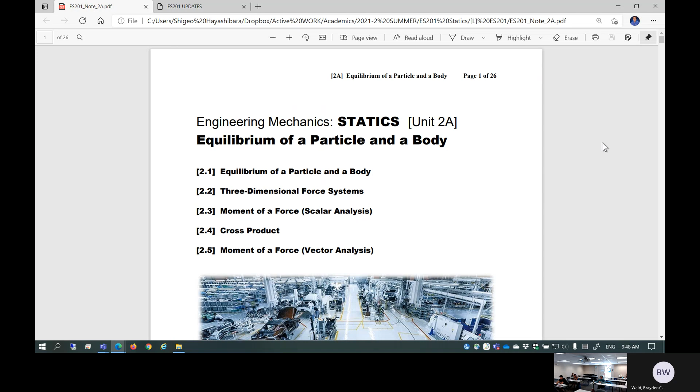I'm not kidding. This actually happened. There's one student taking my aerodynamics class who, during the final exam, raised a hand: I just can't remember the equation of a circle. You mean pi r squared? Yeah, yes. That happens. No problem. Okay. Any other question? All right, let's get going.

So section 2A, we are going to start talking about statics. What do you mean, statics? Do you remember the question? What is statics? I think we talked about that. This is statics. What is statics?

You are going to express a system, a mechanical system of some kind. We are going to start with a small tiny particle, maybe a baseball or something here. You apply force here, force there, force there, force there. Everything is in balance, so the baseball stays in place. Statics. So equilibrium is something we are going to take a look at in this class. This is the main subject.

So we are going to start with a particle, and then apply it on 2D Cartesian, then extend it to 3-dimensional Cartesian space. We are going to introduce a moment. Do you know the moment? Suppose the force is applied right here with this much offset distance; it is going to create the tendency to rotate. That's called moment. So force times distance creates a tendency to rotate. That's essentially the torque of the drive shaft of your car. Anyways, we are going to talk about that.

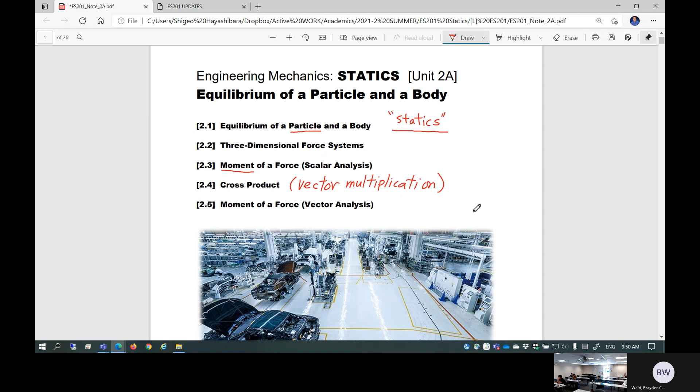At that moment, we are going to introduce the vector cross product. We already looked at the vector dot product. The cross product is sometimes called vector multiplication. Remember, dot product is a scalar multiplication; the result is a scalar. Cross product is vector multiplication; the result is a vector. So a vector cross product against another vector is going to have a vector result, and that resolves a certain value in a certain direction, how much moment is developed. That's the meaning of cross product. So let's begin with the next page.

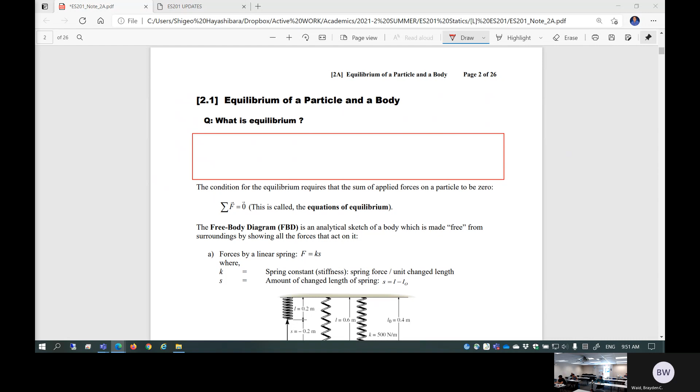Let's begin with a question: what is equilibrium? Interesting question. Anybody? What is an equilibrium? Go ahead, Yashan. "The forces and moments are balanced." Okay. Forces and moments balanced. As a result, no motion. This is essentially what the name statics implies. Okay, go ahead.

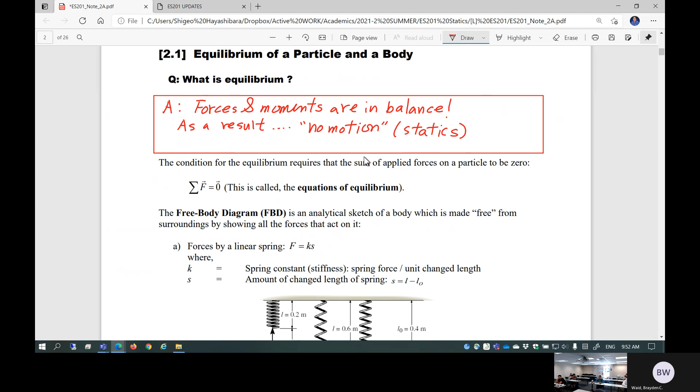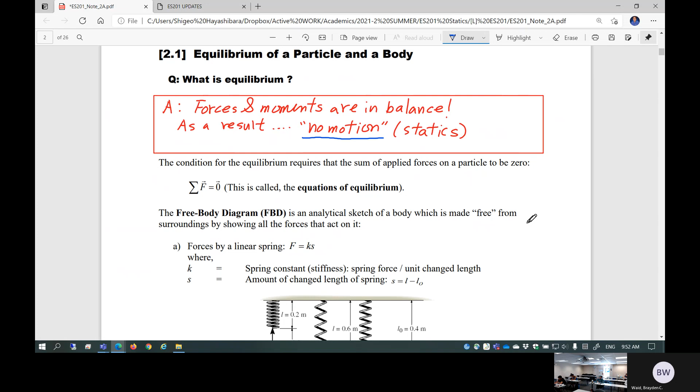"If a particle moves at the same velocity all the time, isn't it equilibrium as well?" It's not static equilibrium, but it's an equilibrium. Yes, you can say that. In other words, you are not accelerating, so constant speed motion stays constant speed. That's also often called equilibrium, but in statics we are going to avoid that because dynamics starts with that discussion. Good point. We restrict ourselves to no motion in this class. If motion is involved, even though it is equilibrium with no acceleration, dynamics will cover that.

All right, very simple. The equation of equilibrium: if you sum up all the force vectors, which could be multiple force vectors in lots of different directions and locations, the result is not zero, it's the zero vector. The summation of all the force vectors becomes the zero vector. Do you understand this? This is not the scalar zero. If this is a 3D Cartesian space, zero vector means that every single component in all three directions is zero.

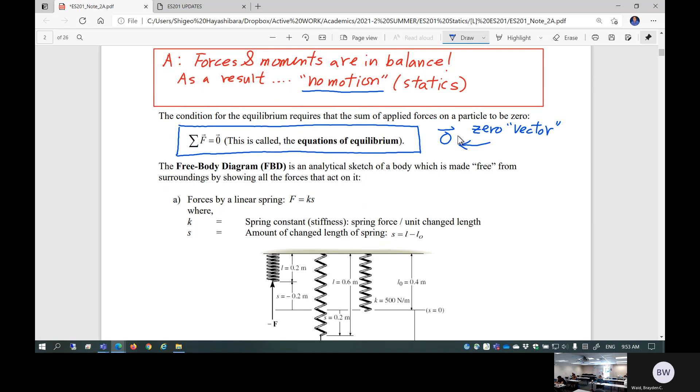That's why we indicate it with a vector notation on top. This is not the scalar zero. Even though the scalar component in x is zero, if you have a non-zero y and z component, the vector is not the zero vector. So let's be careful. I'm going to be very strict about vector notation versus scalar notation, because those are fundamentally very different meanings. Let's not mix up the usage.

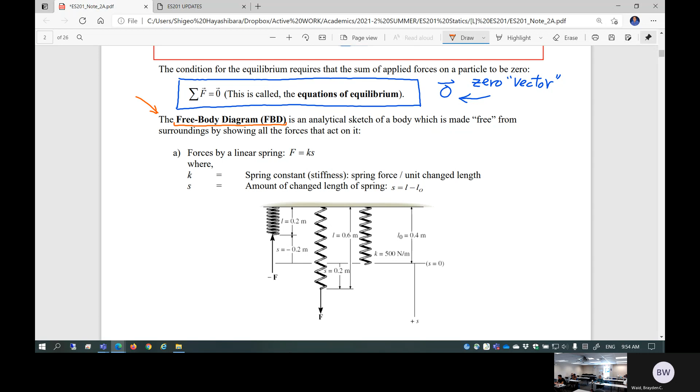Again, the important thing is the free body diagram. This is one of the key elements, as I emphasize all the time. The free body diagram is where you get started. If you draw a poor free body diagram, usually that's it; you can do whatever the rest, but you do the wrong thing anyways. It's super important, especially in statics and solid mechanics. So you have to train yourself as a good sketcher. Do a really good sketch, have a very accurate free body diagram, and your problem is 80% already solved. If you do a poor job, you can never solve anything.

Forces acting on a body, that's called a free body diagram. We are going to spend some time drawing free body diagrams, but there are forces developed within the system or mechanical system. A good example is a spring. This is the linear spring. The equation of the linear spring is force developed equals K times S. K is called the spring constant, or sometimes stiffness.

This is essentially how much spring force is developed per unit change in length. S is, of course, the amount of changed length of the spring. So if you pull the spring and stretch it 0.2 meter, and the spring constant is given, the spring constant multiplied by this S is going to give you the magnitude of the force, for example.

That's the linear spring. You can compress it, of course. If you compress 0.2 meter, we usually indicate a negative sign. With the spring constant multiplied, you're going to determine the force developed or force required to compress that much distance.

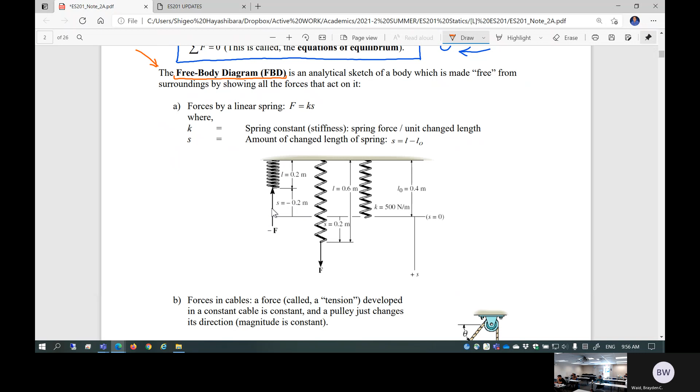Okay. Next one is very typical. There's a rope you're going to pull. A rope can only develop one type of force, something called tension. So we oftentimes use the notation T to indicate tension of the rope. A rope cannot be compressed. You can't do that.

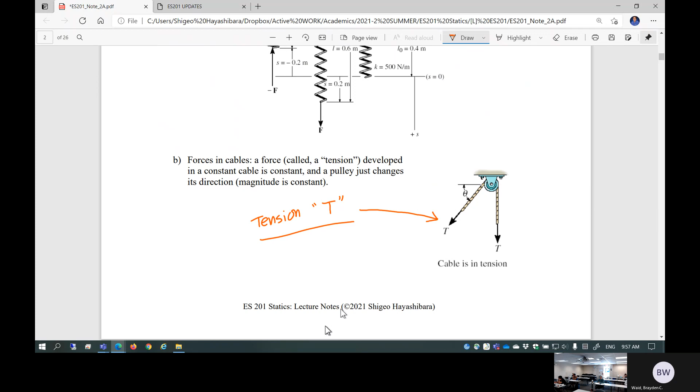Now, if you have a metal bar, you can actually compress or pull. So force could be tensile or compressive, but a rope cannot. So if you see a mechanism with rope, the only type of force you can develop is tension. And the direction is, of course, the direction of the rope. So the force developed inside the rope is in the same direction as the rope, basically. Very simple.

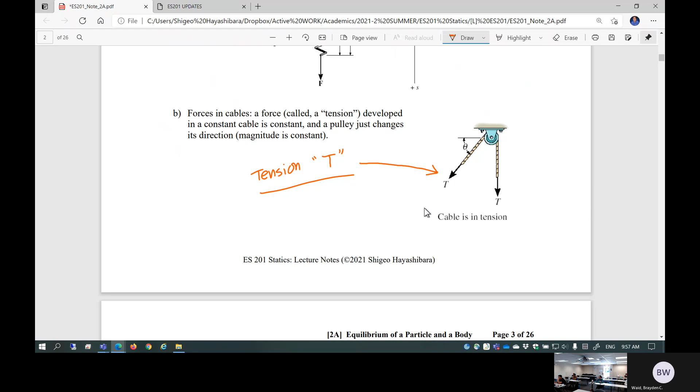Okay. So these are some of the key items of how to draw free body diagrams. There are a few homework assignments and also examples making you practice drawing free body diagrams. Do not underestimate this. This is very, very important practice. This is one of the most important key elements of ES201.

First of all, draw the outlined shape. A body is isolated, free from its surroundings. Free from its surroundings means if a body is connected with a certain device, such as pins, bolts, rollers, or whatever, you're going to try to disassemble it, make the body isolated from those constraints. And as you disassemble, remove the bolt and stuff like that, you're going to replace that with the appropriate reaction forces, support reactions.

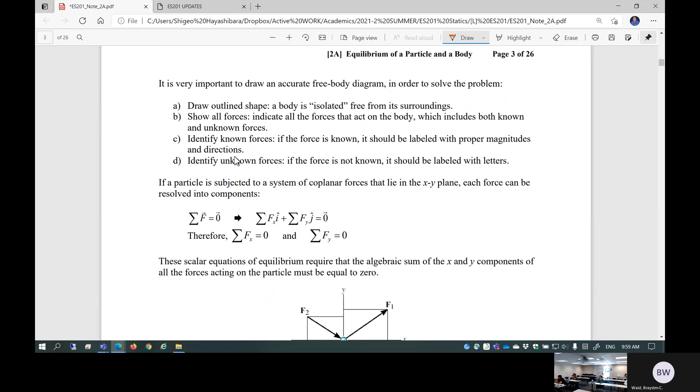And if a force is applied on the body, of course, you're going to put it with an angle, or it could be distributed loading, or a force applied at the tip. If so, you have to draw it. If the body comes with its own weight, you're going to find the center of gravity and apply that weight at that center of gravity. It's also quite important to identify both known and unknown forces, because unknown forces are something you want to find by applying the equations of equilibrium.

So for example, this is a particle. Looks like four forces are acting on it. Two forces are applied in one direction, and those two are applied in the other direction. This is a 2D x and y plane. So you have to identify the components of each force in the x and y directions. If you add them all up in x and in y, you can determine the resultant force components in x and y, then combine them to get the resultant force. And then you can determine the direction of that resultant force.

Isn't that something you did in quiz 1? Did you do it right? I hope so. But if you didn't, please fix it by yourself. Like I showed you, every time I did something wrong, I made the correction myself. In other words, for me, it's acceptable to make mistakes. I'm human, you're human. But it's not okay if you just don't care and don't correct any of your mistakes. It's not okay in terms of engineering standards. I'm not going to pass you in this class if you don't do that. Please correct your mistakes all by yourself.

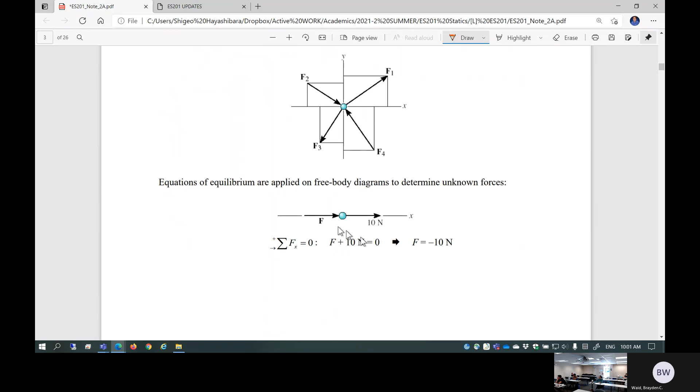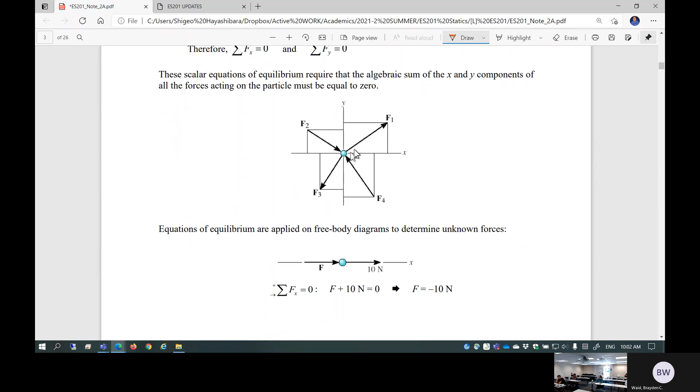Suppose this is like 1D, but this is a particle. Force F is applied in this direction, and 10 Newton is applied. What is the force F? You can find out this force by applying summation of all the forces in x direction set equal to 0. F must be minus 10 Newton if you call this particle in equilibrium. Equilibrium means if you add up all the forces, the result is the zero vector. That is equilibrium. That's why this particle is not going to move. Okay? All right.

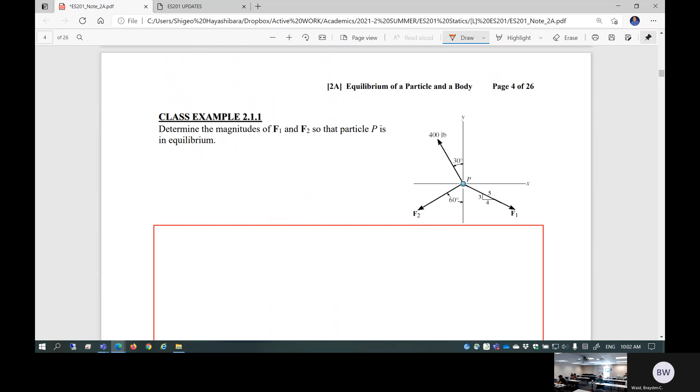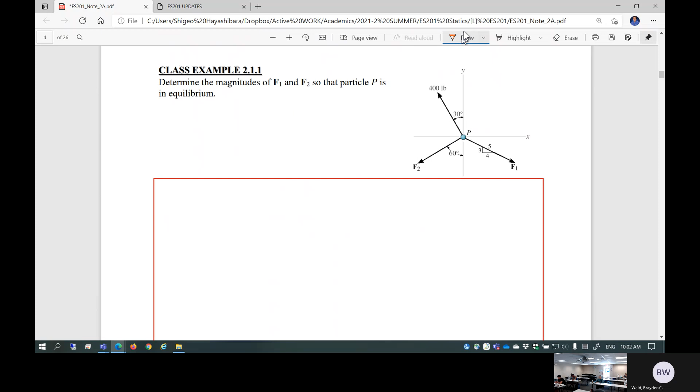So let's just take a look at some examples. Class example 2.1.1, page 4. Determine the magnitude of force F1, F2 so that particle P is in equilibrium. So I'm going to, of course, start with the free body diagram. As we construct the free body diagram, you're going to start with particle P. And I'm going to, first of all, set up the coordinate.

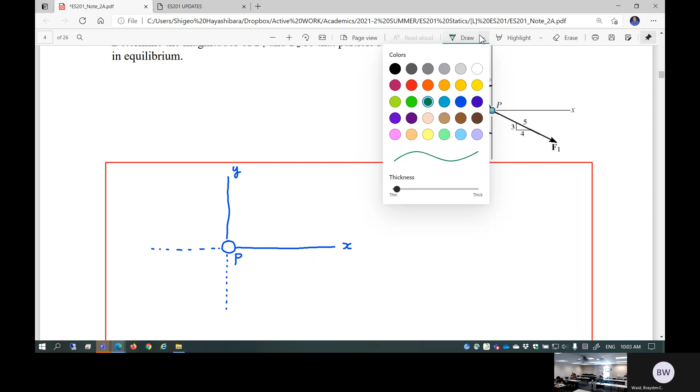I can't do it straight on, but anyway, this is the positive y coordinate. This is negative y direction. This is x coordinate, this is negative, and this is a positive x coordinate. And then let's begin with the known force. I'm going to use green to indicate known. So 400 pounds.

Sorry, I forgot to silence my phone.

Okay, so 400 pounds. This force is applied at 30 degrees from here. And then two unknown forces. I'm going to switch the color here. One of the unknown forces, F2. This is a vector. Looks like this is 60 degrees. And the other force, F1. Looks like the ratio is given, a ratio of 5, 3 and 4. Magnitude, I don't know.

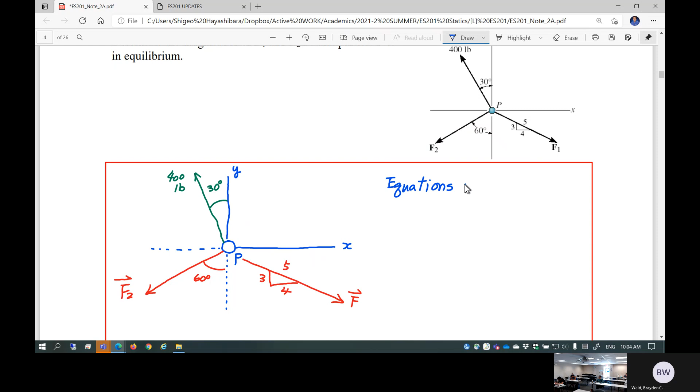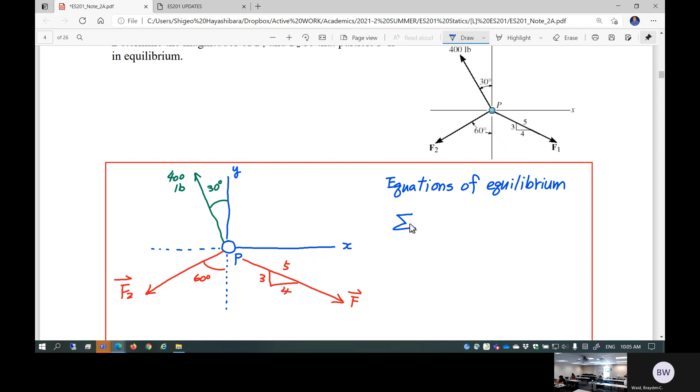So now we are going to apply equations of equilibrium. As you apply the equation of equilibrium, you're going to put the sigma. This is a summation. What kind of summation are you going to do? A force summation. And which direction are you summing the force? X direction. Which direction is positive X? This is the direction of positive X. So let's use this standard.

So I'm going to sum all the forces in X direction. This is the positive X direction coordinate. If this is in equilibrium, this must be 0. This is a scalar. In other words, the X direction components of all the forces must sum to 0. This is a scalar equation. So let's find out all the X direction component forces.

First of all, F1's component of X is this thing. What's this? Magnitude of F1 times what? What is the magnitude of that? The angle between that and... No, magnitude. Well, yeah, but I'm saying the equation. There's no angle given, but the ratio is given. So whatever the magnitude of F1 here, multiplied by 4/5, isn't it? Do you agree? So this is the magnitude of F1.

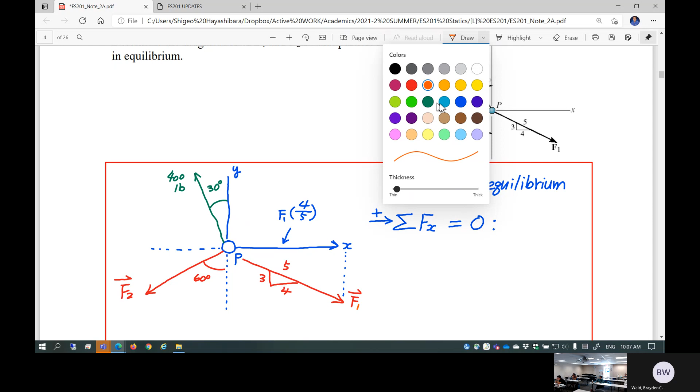What is the component force of F1? So this thing is F1 times 4/5. How about this? Anybody? What's this force? This is F1 times 3/5, correct? That's right. Do you follow that? Okay, so let's break down everything into X and Y components.

Go ahead, question, Ryan? I'm still struggling on why you chose 4/5 for the X direction. Because 4 is the X direction, and this is magnitude. Oh, that's X direction. That's right, this is X direction, and 3 is the Y direction, and 5. Okay.

And how about this? This is 400 times what? Sine or cosine? Which one? 400 sine 30. How about this force? This is 400 cosine 30. Do you follow? This is the 400 pounds x direction component, and this is the 400 pounds y direction component. So this is 400 sine 30, and this is 400 cosine 30. Do you follow that? I hope.

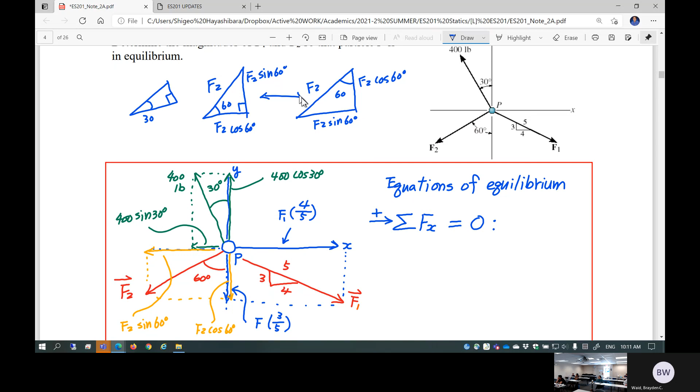You can sort of change the direction of that, making it like this. Let's say this is 60. This is 90. This is still F2. What's this? F2 cosine 60, right? This is F2 sine 60, right? Yeah. Same thing. Yeah, so it's just the same thing. Gotcha. You have to kind of rotate and take a look. Yeah. All right, anyways. So let's just add them up.

So forces in the x direction: F1 is, of course, this one. F1 times 4/5. This is a positive direction. Let's be careful. How about F2? This is minus because it's negative direction. This is F2 sine 60, right? How about 400 pounds? Again, it's negative. Be careful. 400 sine 30. This must be equal to 0. Okay?

This is one of the equations you came up with. Let's just simplify a little bit. This is going to be 0.8 F1 minus 0.866 F2 minus 200 is equal to 0. So you got one equation. Now this equation includes two unknowns. Do you realize it? F1 and F2, two unknowns. So this equation alone cannot solve this problem. You can only get the ratio of F1 and F2. Okay, that's the best you can do.

So you need other information. What is it? Of course, you can sum forces in the y direction, and then let's say this is the positive y direction axis. Okay, let's just set it equal to 0. Let's just do the same thing. So now F1's y direction component is this. Okay, be careful, it's negative. Negative F1. So this is F1. Okay, so this thing is negative y direction. So negative F1 times 3/5, right?

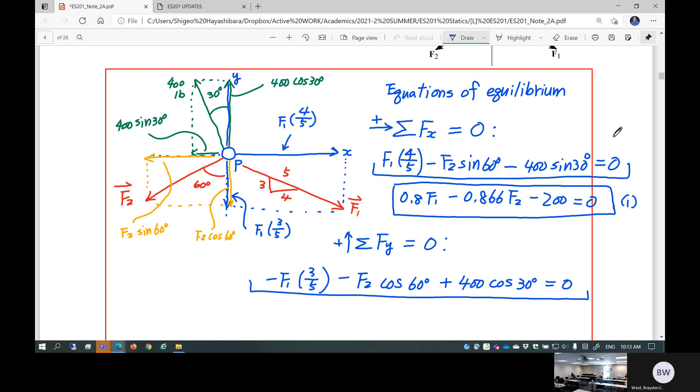Let's just simplify a little bit more. This is going to be minus 0.6 F1 minus 0.5 F2 plus 346.41 is equal to 0. Oh, you got the second equation with also two unknowns, F1 and F2. So now you have equation 1 and equation 2. So now you have to solve these simultaneously. Can you do such a thing?

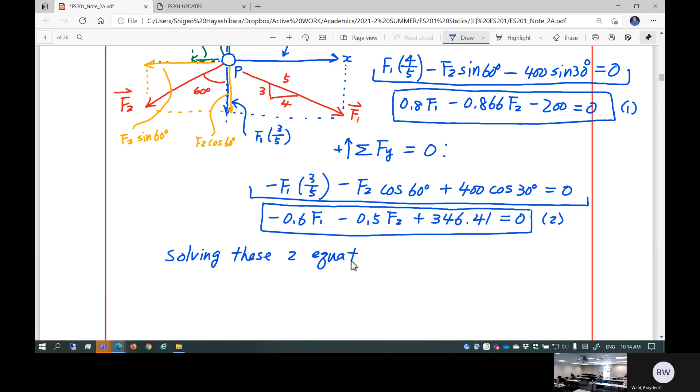Can you do such a thing? So let's just try. I wait for you, but just try to find out F1, F2. Because when I prepare this solution, I use software. I'm no longer solving two simultaneous equations, two unknowns by hand. Do you know how to do this? Let's just challenge yourself, because you will probably have to do this for your next quiz. Go ahead and do that, each person. Find out if you can do this kind of solution.

And then, of course, I welcome Brayden to basically join in and give the result. Can you get the value? Please, everybody, participate. If you want to get a good grade on the next quiz, do it. Get busy.

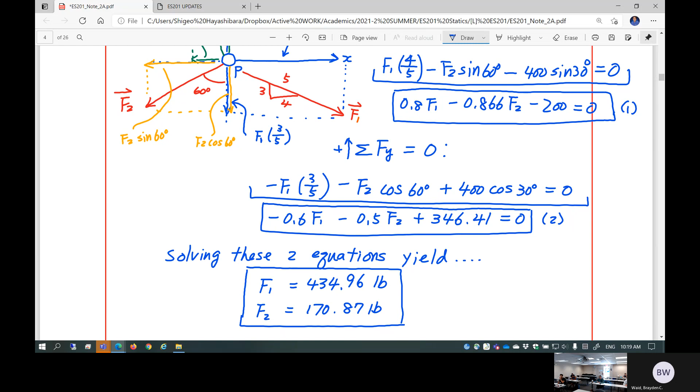Okay, guaranteed this kind of thing will show up on the next quiz. If you cannot solve it within the given time, you're not gonna pass this class. Sorry. Okay, pick up that kind of skill. This is not math class. I'm not gonna teach you how to do it. All right, let's move on.

So this is the homework. 2.1.1, determine the magnitude and the angle theta of F1 so that particle P is in equilibrium. Essentially the same kind of problem. So please do it right after today. I mean it, right after today. You actually start working on those problems. Do not leave it to the last minute. Okay?

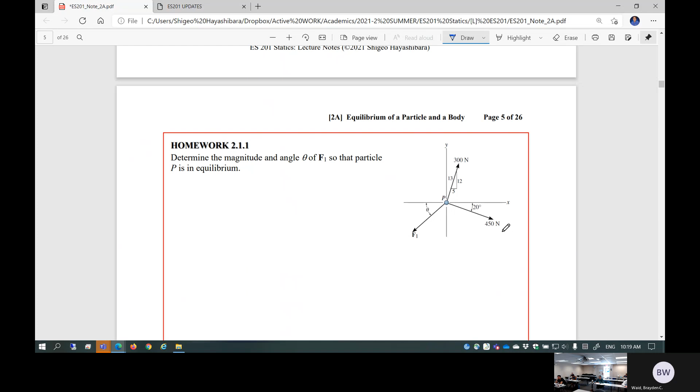Yes. Anybody else? Yeah. You go with, oh, this is mass. It specifies, so I think it's mass. Yeah, it's mass. It doesn't specify if it's a mass or not. The problem doesn't say anything about it. Is this mass? Oh my goodness. Because force, you would say 12 kilogram force. Oh, you're saying this is a force? No, this is a mass. So this is a 12 kilogram mass, you say?

Okay, go ahead. Is it force when they use the notation? Oh, this is a force if it's a notation of newtons. Can you convert kilogram into newtons? One is mass, one is force. You cannot convert those two. Wait a minute, didn't you take a quiz? So who actually takes it as a 12 kilogram mass? Raise your hand. One person, two, three, four, five, huh?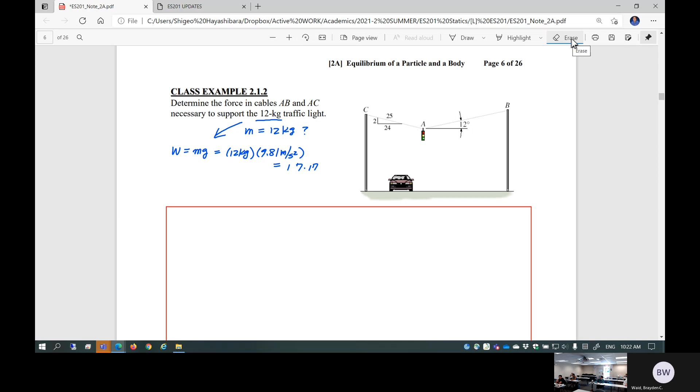If so, this is a mass, right? So you have to figure out what is the weight. Weight is mass times gravity. So let's just do that, 12 kilogram multiplied by g, 9.81 meter per second squared. How much? 117.72. Is that right? 117.72. What's the unit? Newton.

Let's convert it to kilogram force. 1 kgf is 9.81 newtons. How much kilogram force do you have? 12 kilogram force. That's right. So either you can take mass 12 kilogram and then use the Newton value as a standard unit, you can do that, of course. Or, this is 12 kilogram force, so I'm going to use the value 12, knowing kilogram force is a unit, but not standard. So I think it's a good idea to stick with this because this is a standard unit of weight or force.

So this 12 kilogram traffic light is actually 117.72 Newton. As an engineer, I think it's very healthy to use the standard unit. So let's use the standard unit, Newton. But suppose you pick up 12 and knowingly use 12 as kilogram force, because we are adding force, not mass, I'll give you full credit too. But you have to be very careful because you intentionally picked the non-standard unit in your calculation.

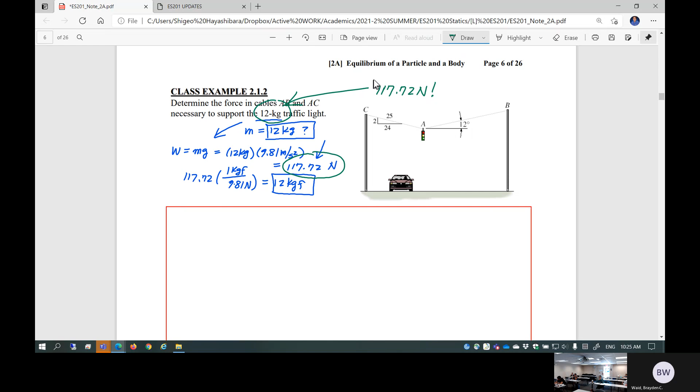Guess who's going to teach fluids? I don't know. Maybe me. I'm not sure, but don't totally mix up kilogram force and kilogram mass. It's a big no-no in engineering. So it's safe to stick with this because it's standard.

Okay, so I'm going to draw a free body diagram to begin with. So this is a traffic light. Here we go. This one has a weight W. This is going to be 117.72 Newton, going downwards. Vector notation wise, this is like Y, sorry, J. I'm going to just do simply W. W is 117.72 Newton, direction going down.

Okay, so let's draw a coordinate. This traffic light is one of those cheap ones, right? A suspended wire kind of traffic light. Anyway, this is the X coordinate, this is the Y direction. And obviously two forces support it: cable AC and cable AB. In the direction of cable AB, you have a force developed, only tension. So let's use tension T, direction A to B.

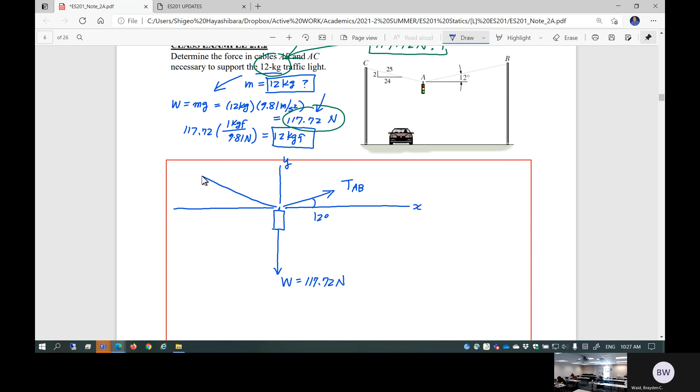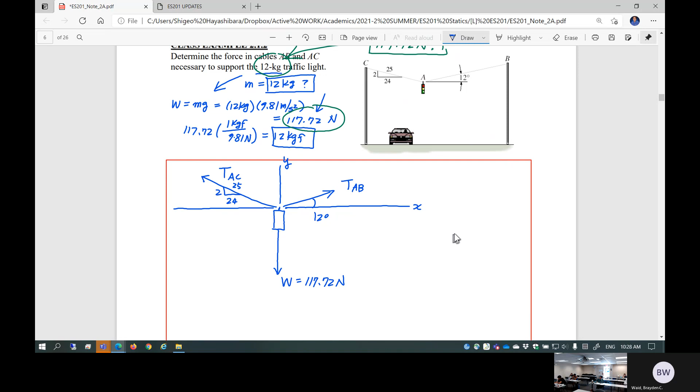And on the other side, the angle is given here. Angle is 12 degrees. The other side is similar. You have the other cable, cable AC. Tension TAC is developed. The direction: this is 2, 24, 25. Those are the ratios given. This is TAB because it's A to B, and this is TAC because it's A to C. Before we move on, yeah, it's okay. So this is the sketch.

So obviously, those two forces have components. Let's figure out the components because that's more convenient, in the X and Y directions. What's this? And what's that?

What's this? Anybody? What's this force? Magnitude? F times cosine. TAB times cosine 12. You follow? How about this? TAB sine 12. Correct.

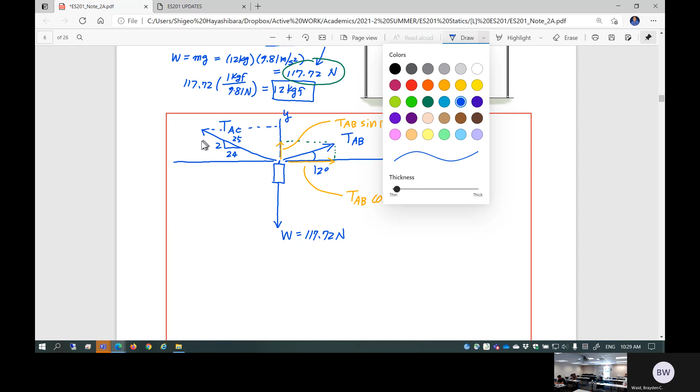All right. Let's do the same thing for the other side. Okay. So two components. This. No, don't do that. So, okay, two components. Sorry. This and that. What's that? TAC times 24 over 25.

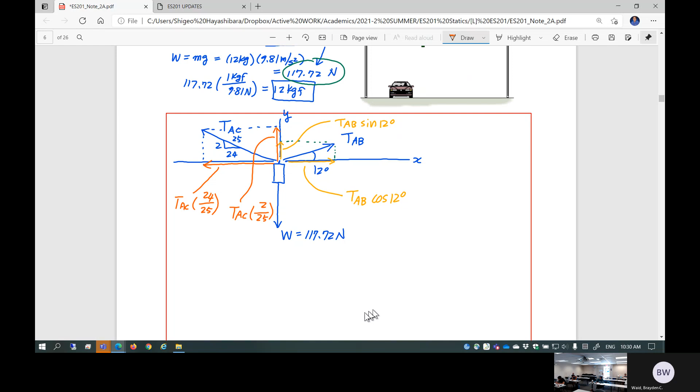This is going to be 24 over 25. That's right. Do you follow that? Everybody follow? 24 over 25. Okay. How about this? 2 over 25. That's right. So those are all the components in each direction. So let's just now apply summation of forces in each direction. Okay. So equations of equilibrium.

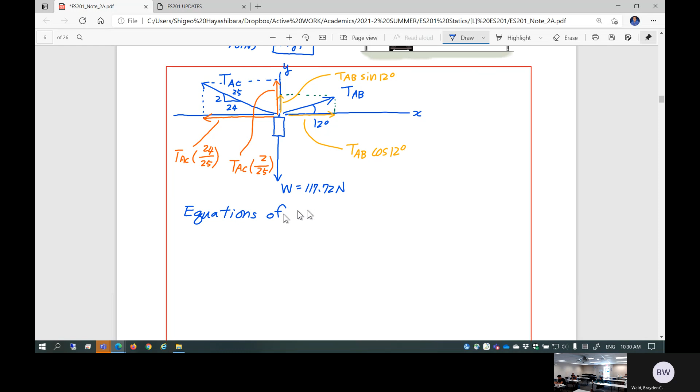Equations of equilibrium. First of all, let's just add all the forces in x direction. This is the positive direction of x. Let's set equal to 0. If it's equilibrium, this should happen. So this is TAB cosine 12, positive x direction. How about this? This is a negative x direction, so it's negative TAC times 24 over 25. Those two added up, it's equal to 0.

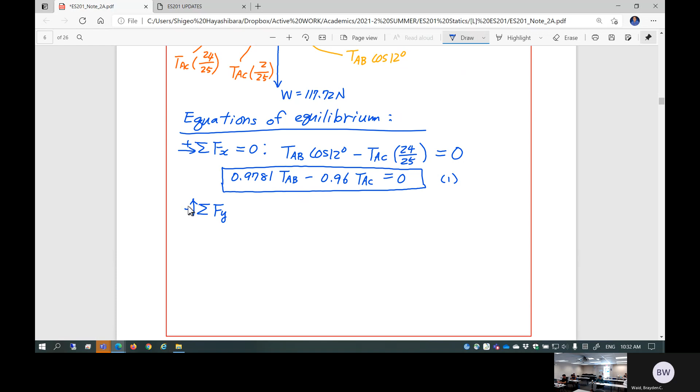Just to simplify a little bit, 0.9781 TAB minus 0.96 TAC is equal to 0. So this is equation 1. Well, two unknowns, TAB, TAC. Let's do the summation of the force in y direction, set equal to 0. So y direction. Don't forget the W though, okay? Now, this is a weight in y direction.

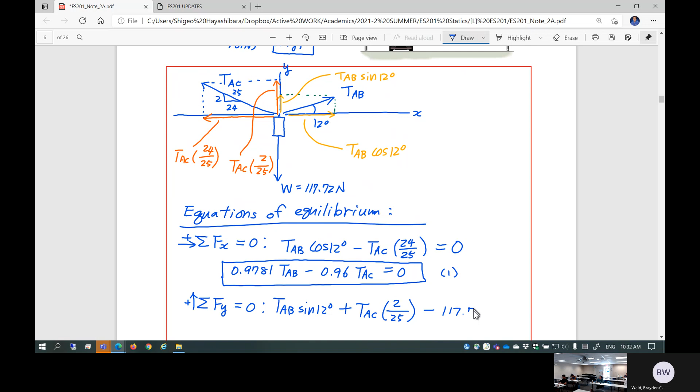So this force, this is a positive y, TAB sine 12. And this force, this is also positive. This is a positive TAC, 2 over 25. Don't forget the weight. Weight is a negative y direction, so negative 117.72 Newton. All of them added together should be equal to 0.

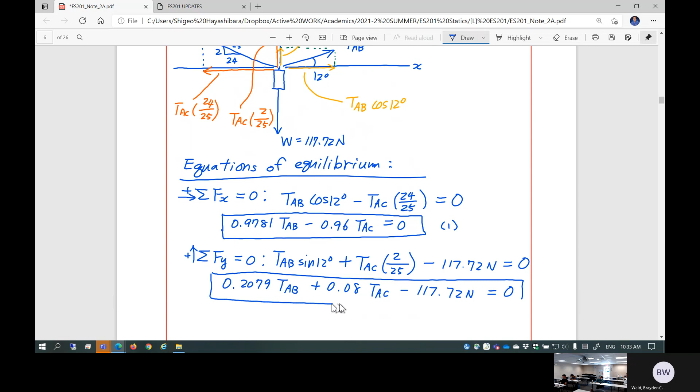So simplify a little bit. This is going to be 0.2079 TAB plus 0.08 TAC minus 117.72 Newton is equal to 0. So this is the second equation we just picked up. So now again, this is two equations with two unknowns, TAB and TAC. So let's just try to solve it.

I'll wait for you this time. How much time does it take to solve this kind of simultaneous equation? Just go ahead, do your best. I wait for you. Next quiz, you have to do this anyways. Just do it. Don't you have a calculator with a simultaneous equation solver or something? If so, find out how to use it. Now is the time. If you don't have such a thing, just pick up a piece of paper, do arithmetic and find out two unknowns. Everybody do it.

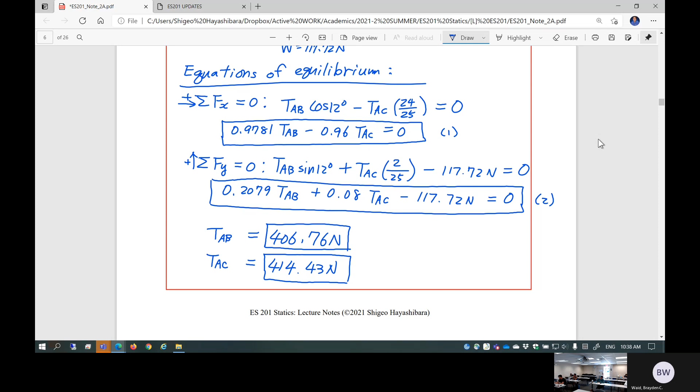All right. So this is homework 2.1.2, next page, page 7. Okay. This is again going to make you draw a free body diagram. Do you realize that I'm doing free body diagrams?

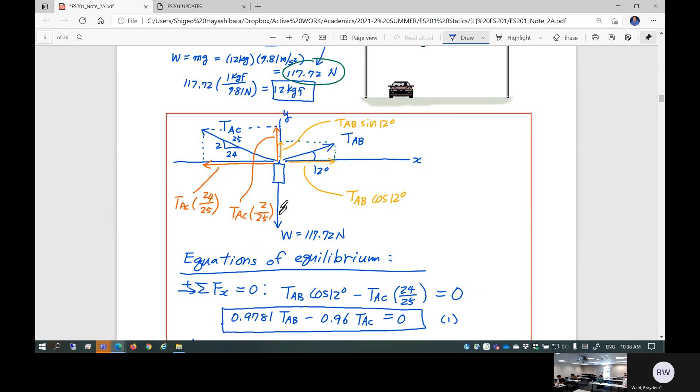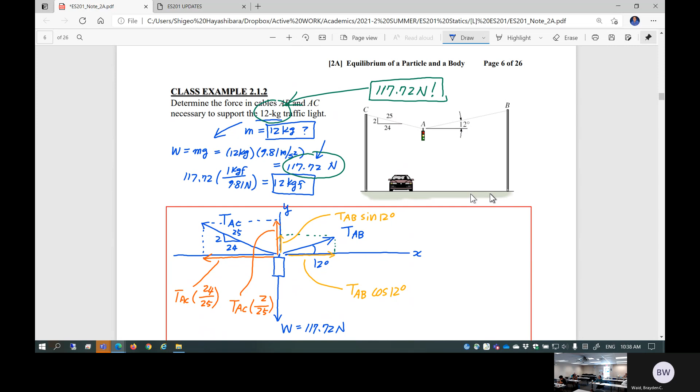This is the traffic light with the weight of this much Newton. Coordinate is set, two forces applied. This is a cable AB, AC. Now, follow the standard notation. If I say tension AB, that means this is the tensile force, direction-wise, from A to B. That's why it's AB. This is a tensile force from A to C. That's why TAC. If it's opposite, I may end up calling BA or CA. There's a reason for it. So this is going to indicate the direction. Okay, so it's just to follow standard notation.

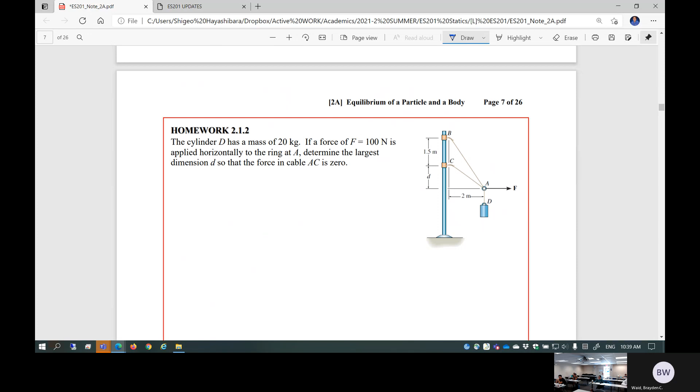So I guess the important thing about this homework is you have to draw the free body diagram very accurately. If you don't do that, I guess the solution is essentially meaningless. Okay, wrong free body diagram, that's it, you're done. Okay, don't underestimate. Also, another homework here.

If you take it as a force and you don't like it, convert it to Newton. That's fine, because Newton is standard. You don't have to worry about anything. You can use kilogram force, that's fine. If you take it as a mass, of course, you're going to automatically multiply by 9.81 and make it Newton. That's what we did in the traffic light. That's fine too. Either way, be consistent, that's what it is. All right. So, yeah, I think I did this solution recently.

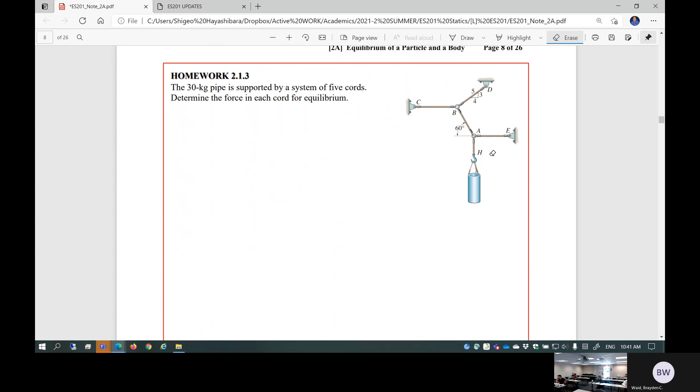Because for every single cord, you have to find the force developed inside. So you need probably at least 3 free body diagrams. Does it make sense? Don't be lazy, okay? The free body diagram is quite important to solve this problem. And then you should start today. Don't wait until, I don't know, when is the next homework due? Do you think you can retain today's memory? I don't think so.

Next page, let's just take a look at the 3-dimensional force systems. Now we are going to extend from 2D to 3D Cartesian. Now the sketch becomes more complicated, challenging. So you may end up spending more time drawing a more accurate sketch in 3D. And then a 3D sketch involves recognition of planes.

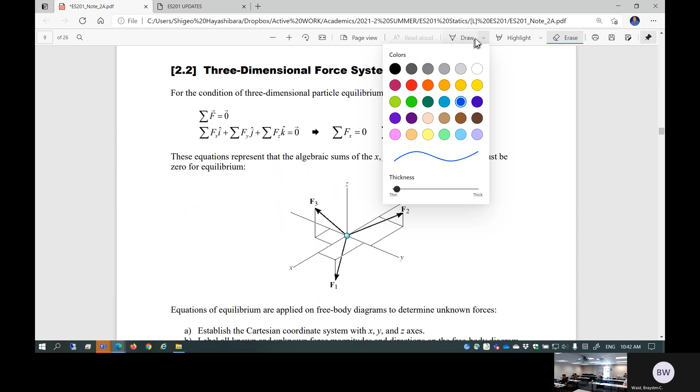Recognition of planes. So when you draw a sketch of a 3-dimensional Cartesian coordinate, this is a free body diagram of a single particle, right? When you draw such a thing, first of all, X, Y, and Z coordinate directions are specified, and then you're going to create 3 planes. This plane is called the XY plane. You're going to draw an XY plane figure. So if you project F3 to the XY plane, this is F3's XY plane component, right? So this is F3 projected down to the XY plane. So on the XY plane, you have this much component of F3.

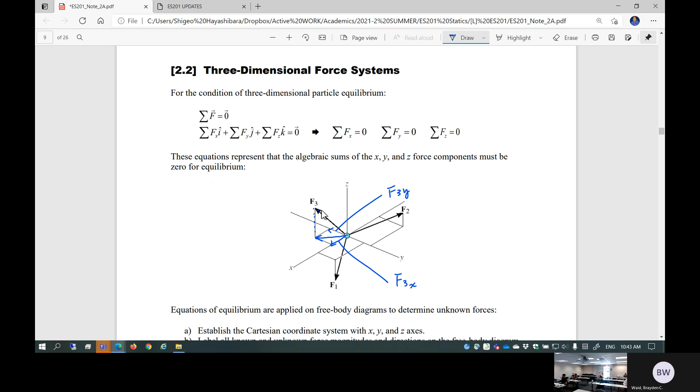That F3 can be resolved into 2 components, which are Y and X. So this is F3X. This is F3Y. F3X and F3Y get you this, F3 projected component on the XY plane. Then that one added together with this, okay? This is F3Z. So you can resolve F3 into three components, F3X, F3Y, F3Z.

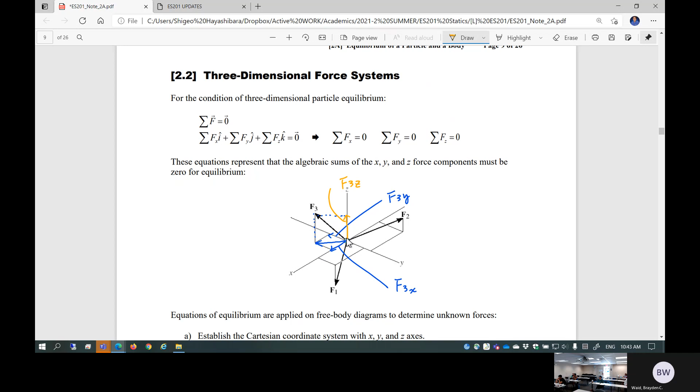It's not easy doing such a thing, okay? So you have to basically always think about, okay, this is the plane, and if I project this force into this plane, this is the projected force onto this plane. You can resolve it then into two direction components of that particular plane, usually XY. So the sketch is quite important. If you do an inaccurate drawing, it is going to screw up really easily. So spend some time, do the free body diagram to begin with.

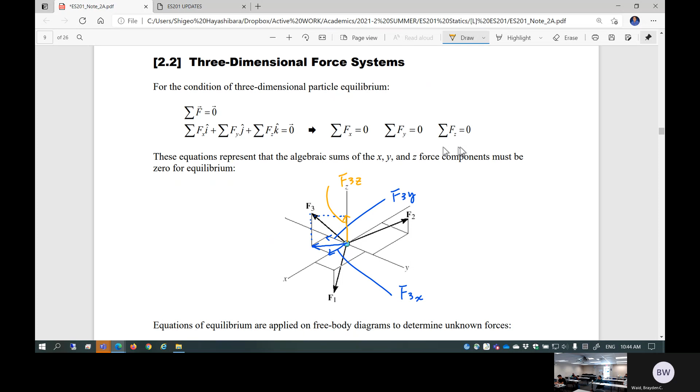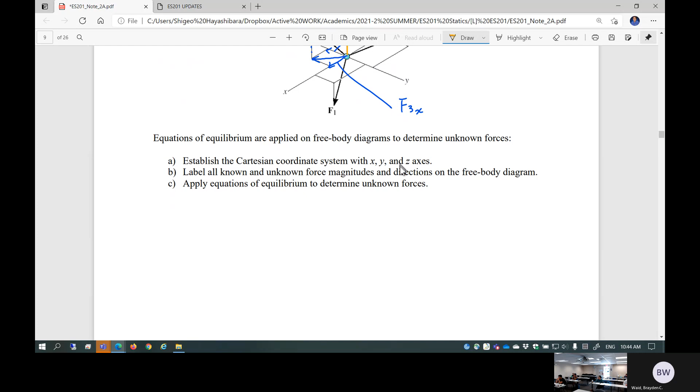And then the rest is the same thing. Because this is three-dimensional, you're going to sum forces in the X direction, Y direction, Z direction. This is the equation of equilibrium. Equations of equilibrium are applied on free body diagrams for 3D space. First of all, the Cartesian coordinate system X, Y, Z must be set up, okay? And then label all known and unknown forces. Apply equations of equilibrium. Let's just take a look at the next page.

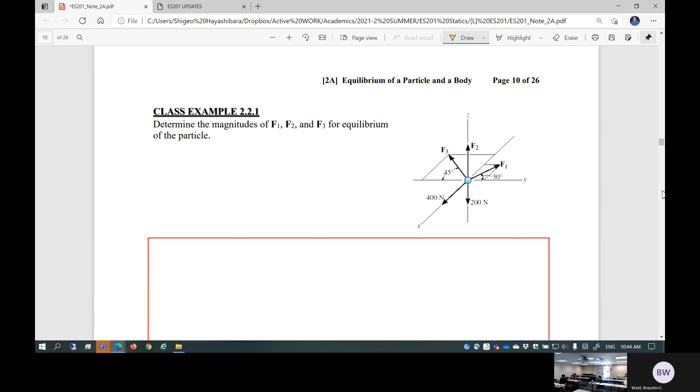Example 2.2.1. Oh my goodness. Determine the magnitude of F1, F2, and F3 for equilibrium of the particle. So I'm going to once again sketch this particle. So the particle is here, and I'm going to draw the coordinate. This is the Z coordinate. This is the Y coordinate. Again, right-hand coordinate. This is the X coordinate. And then the important thing is I'm going to draw the forces, okay? Force F1.

So force F1 looks like, okay? So I'm going to stretch out X in negative direction coordinate. So force F1 is going to be projected onto X and Y. So this is force F1. Force F1 is on XY plane, looks right. Yeah, this is on XY plane. How about the other forces?

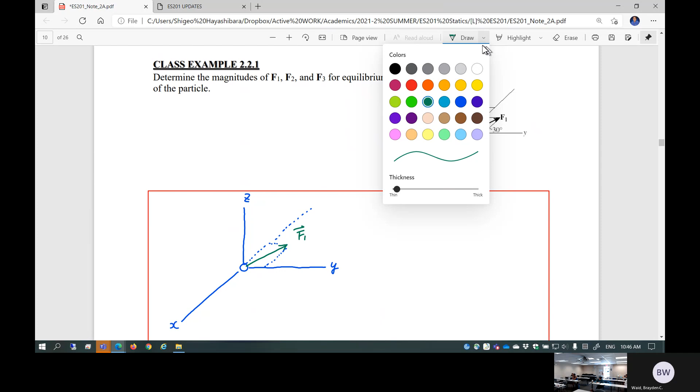Force F2 is straight up in Z direction, isn't it? This is F2. Force F3. Okay, force F3 is, oh my goodness, I hate to do this, but anyway, so this is force F3. So I'm going to, again, stretch out the Y coordinate in negative direction. Then draw a line like this. And then looks like this is 45 degrees.

So let's say this is XY plane. Once again, this is XY plane. This is 30 degrees. So it looks like F3 is also on XZ plane. Okay? 200 newtons is straight down, looks like. This is the 200 Newton. 400 Newton is basically in positive X direction, 400 Newtons.

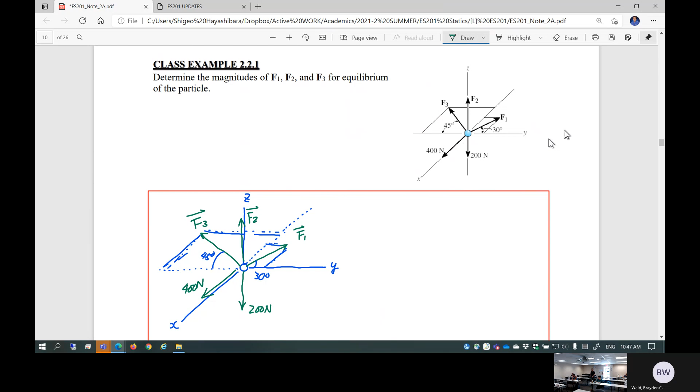Okay. So this is a sketch, the best sketch I had using digital device. Like I said, I hate the digital device doing such a thing, but with a piece of paper with straight edge, you can do better job than this. So let's just apply equations of equilibrium.

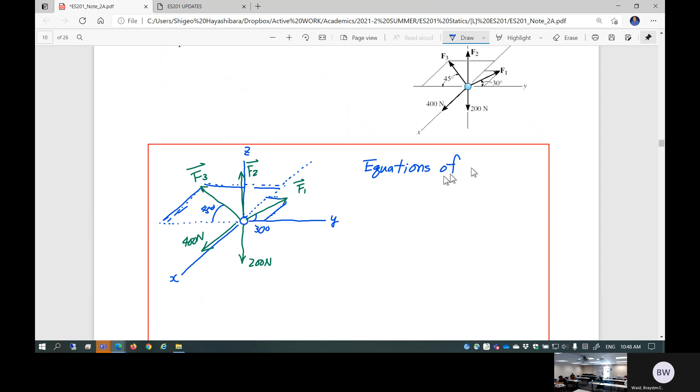Okay, so I'm going to do summation of force in X direction set equal to 0. Now, this direction is X, okay? So first of all, 400 Newton force is in X direction. That's right, this one. What else? F1's X direction component is that. What is it? It's a negative. What's this? Sine 30, that's correct. F1 sine 30 degrees.

And also F3's X direction component, which is this. What is that then? This is the F3 sine 45. It's positive or negative? Negative. F3 sine 45. That's it, right? Set equal to 0. Let's just simplify a little bit. This is minus 0.5 F1 minus 0.707 F3 plus 400 equal to 0. So this is equation 1 you got.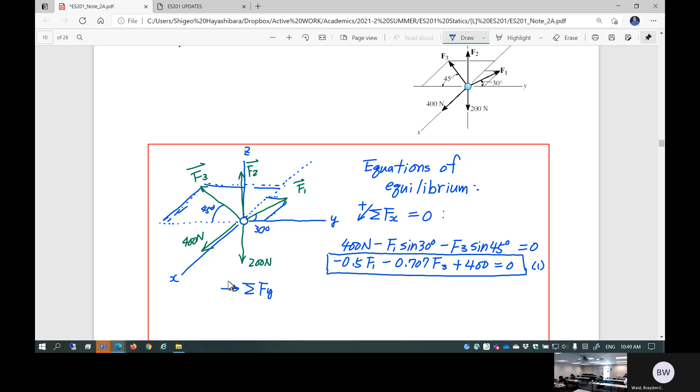Okay, let's just do the summation of the force in y direction. Y direction is this way. Let's just set equal to 0. So y direction, you have force F1, this much force, positive. What is that? F1 cosine 30, that's right. F3's y direction component is this much. This is negative. How much? Negative F3 cosine 45. That's right.

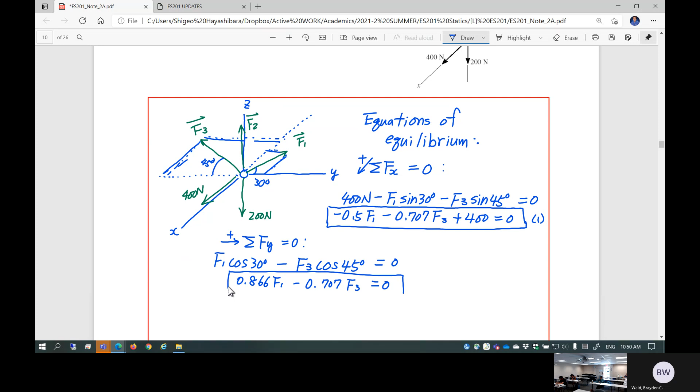That's it, right? It's equal to 0. So if you simplify, this is 0.866 F1 minus 0.707 F3 is equal to 0. That's right. Equation 2. All right. How about summation of the force in z direction? This direction is Z. Just set equal to 0.

Okay. Oops, 5 more minutes. Okay.

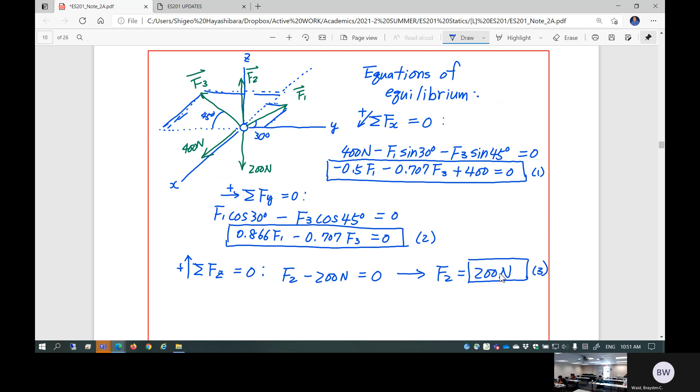So Z direction, there are quite a few. F2 is straight up positive Z direction, and then negative 200 Newton. That's it, right? Oh, this actually gives you a single answer, right? F2 is equal to 200 Newton. So, oh, you got one. This actually creates chain reaction, isn't it? So this equation, no, you can't. You still need to solve 1 and 2, okay?

Solving equation 1 and 2. Of course, you can do that. So equation 1 and 2 simultaneously solved, like you did in the previous example problem. You can get F1 and F3. Please do the math by yourself, but F1 should be 292.83 Newton. F3, 358.68 Newton. Okay? Do the math by yourself.